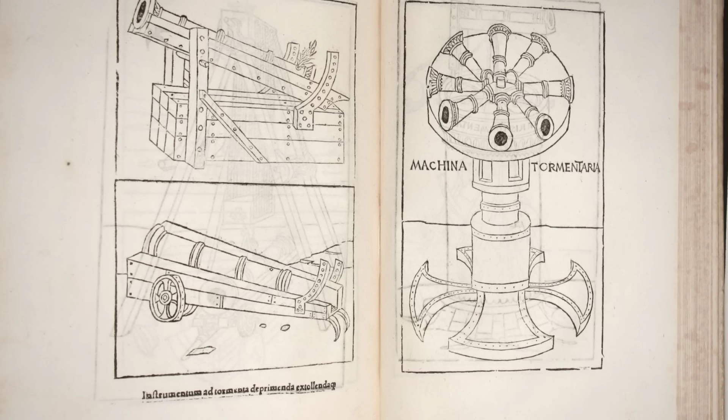We begin not with a monument, a factory, or a patent office, but with a book that should not contain what it contains, a book whose pages describe machines that would not be built, fielded, or even named until centuries after the ink dried. The parchment is cracked, the handwriting slants, the diagrams are colored by hand, and yet inside those diagrams are the compound crank, the camshaft, the feedback loop, the programmable drum, the pressure valve, the rocket, the diving suit, and the logic of every piston engine on Earth.

5 of these books survive. Each one predates the invention it describes by a margin that should not be possible. We are going to open all 5, and we are going to count them down in reverse, because the oldest and the strangest comes last.

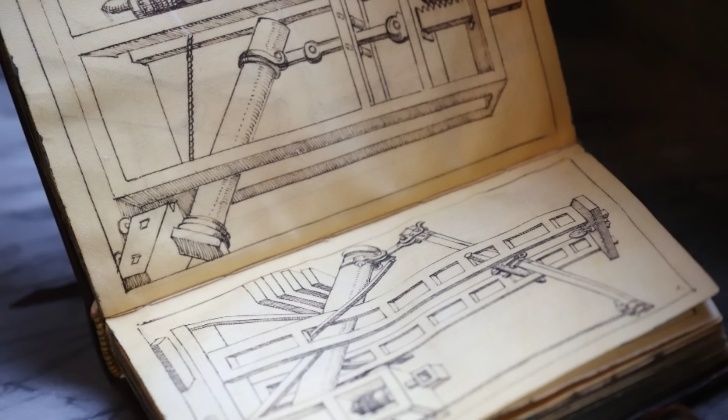Number 5. Siena, central Italy. The year is 1433. A city engineer named Mariano di Jacopo, better known by his nickname Taccola, is finishing a manuscript he has been working on for 14 years. He calls it De Ingeneis, on engines. 4 books bound together, hundreds of folios, thousands of drawings.

The manuscript is timed for a royal visit. King Sigismund of Luxembourg is passing through Siena on his way to be crowned Holy Roman Emperor in Rome, and Taccola wants to present the book to him personally. What Sigismund holds in his hands that day is the single most important technical document of the 15th century, and nobody in that room fully understands it.

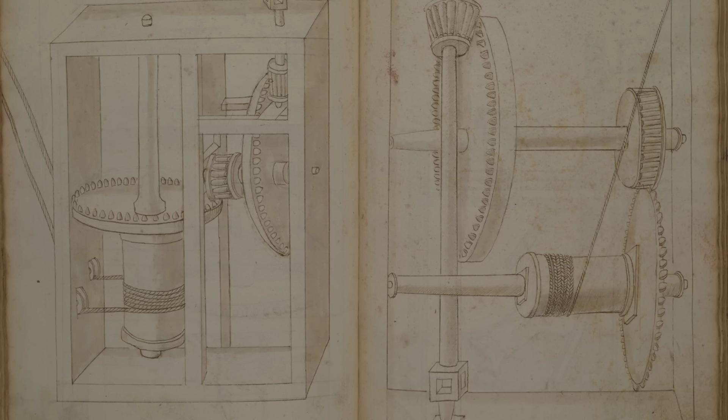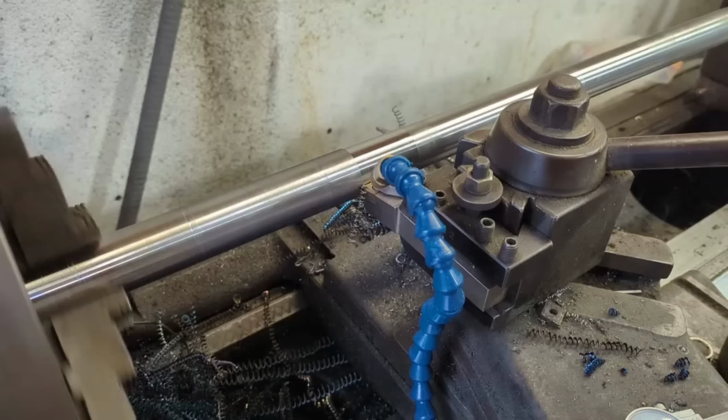Because buried in the pages of De Ingeneis are 2 mechanisms that will quietly reshape the next 500 years of human civilization. The first is the chain transmission, the direct ancestor of the bicycle chain, the motorcycle chain, the roller chain that drives every industrial conveyor on the planet. The second, and this is where the impossibility begins, is the crank with connecting rod, the compound crank.

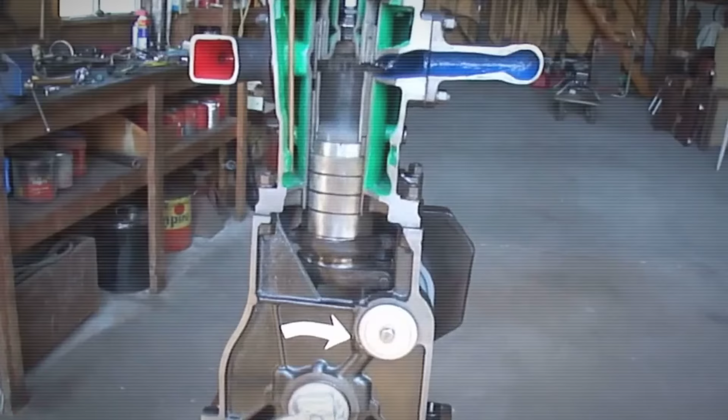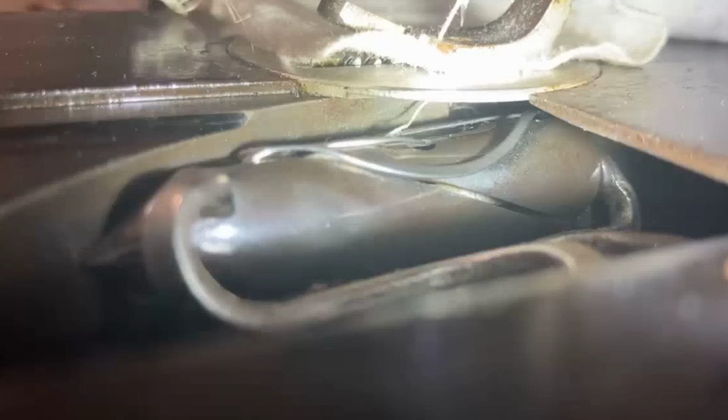Stop for a moment and consider what that mechanism actually does. It takes a wheel going round and round, and it converts that circular motion into a piston going back and forth. That is the defining component of the steam engine. It is the defining component of the internal combustion engine. It is the defining component of the sewing machine, the locomotive, the water pump, and the pneumatic drill. Every car engine on Earth runs on this principle.

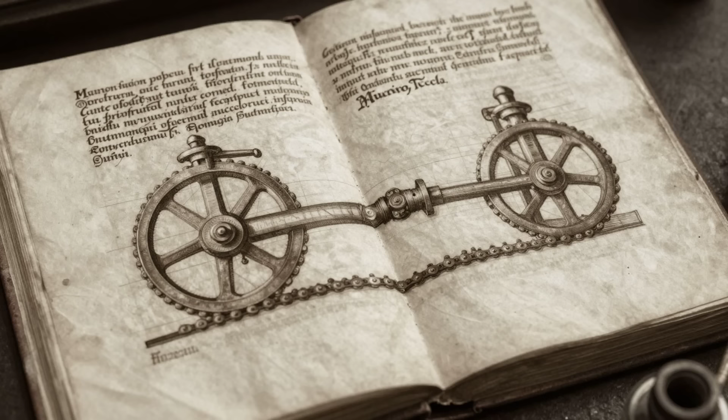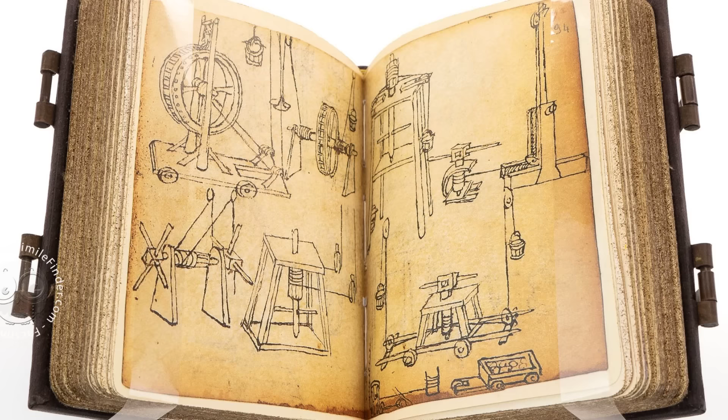Taccola drew it 400 years before the Industrial Revolution would run on it. He drew it while he was supervising road repairs in a medieval Italian city-state. He drew it next to sketches of harbor cranes and aqueducts and siege engines, as if it were just another useful machine. Taccola was nicknamed the Sienese Archimedes. He was a notary, a sculptor, a superintendent of roads, and a hydraulic engineer. His drawings influenced Francesco di Giorgio, the next great Sienese engineer.

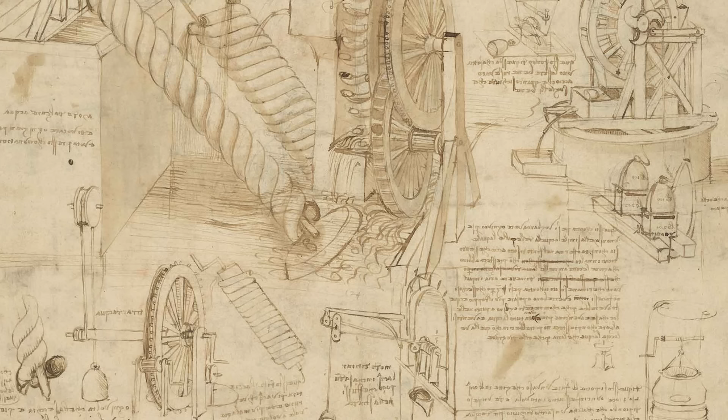And through Francesco di Giorgio, they reached the hands of a young Tuscan polymath named Leonardo da Vinci. Leonardo's Codex Atlanticus, the most famous engineering notebook in Western history, contains chain transmissions and crank mechanisms that are demonstrably traceable back to Taccola. The man credited with inventing the modern machine simply copied them from the man who actually did. Skeptics argue Taccola only documented existing craft knowledge rather than inventing anything himself.

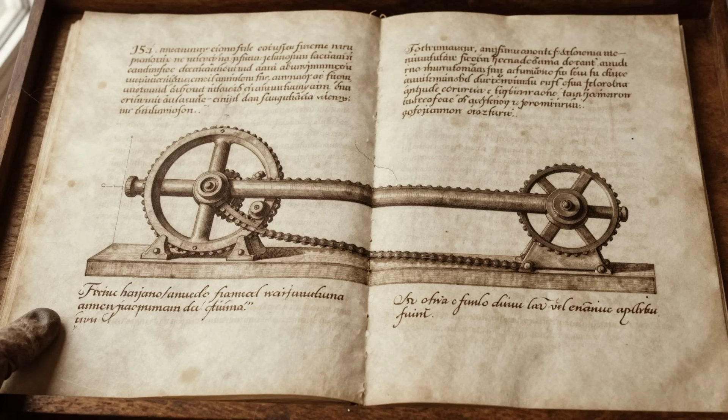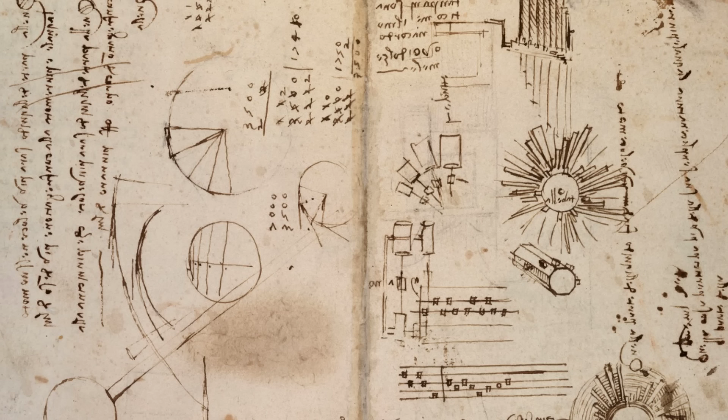It does not matter. The manuscript is the earliest explicit written record. Before De Ingeneis, the compound crank with connecting rod does not exist on paper in European civilization. After De Ingeneis, it exists in Leonardo's notebooks, then in German mining manuals, then in steam engine patents, then in every mechanical dictionary from the Enlightenment forward. There is a single doorway, and the doorway is a Sienese civil engineer sketching by candlelight in 1433, waiting for a king.

Number 4. A man walks underwater in a sealed suit. Another sketches rockets arcing across the sky. Both drawings sit on facing pages of the same book, almost 4 centuries before either weapon reaches a European battlefield.

Eichstätt, Bavaria. The year is 1405. A physician and military engineer named Konrad Kyeser is living in political exile. He used to serve King Wenceslaus IV of Bohemia at the court in Prague, until Wenceslaus was deposed in 1400 and Kyeser had to flee. He has spent the last 3 years in a small Bavarian town, writing and illustrating a manuscript he calls Bellifortis, Latin for strong in war.

The finished book is roughly 140 folios of parchment, every page illustrated in color, every mechanism labeled. It survives today at the University of Göttingen Library under the shelf mark Codex Ms. Philos, 63. Kyeser dedicates it to Rupert, the new German king.

What he presents is the first fully illustrated manual of military technology in European history, and it contains technology that European armies will not actually field for centuries. Turn to one folio and you find a man walking underwater in a sealed suit, a diving suit. Not a bell, not a barrel, a suit.

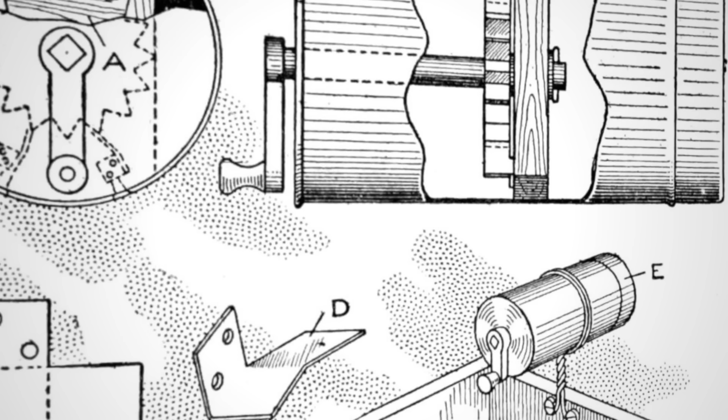A wheel with mercury-filled hammers attached to its rim, designed so that the falling hammers on one side will always outweigh the rising hammers on the other, so that the wheel will turn forever without any input. It will not work. The physics does not permit it. But Villard is the first European and one of the earliest writers anywhere on Earth to attempt perpetual motion on paper. The concept itself, the very idea of a machine that runs forever, would not be named in Western science for decades after his death.

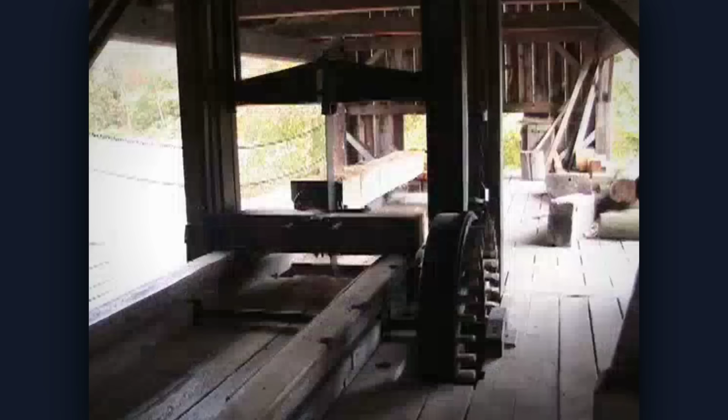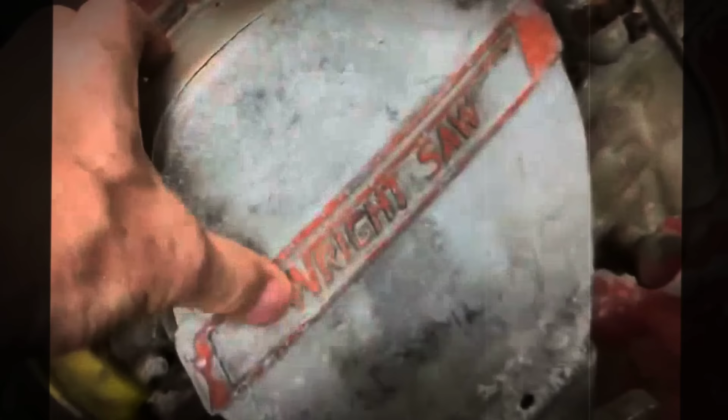Turn another page. A water-driven sawmill, not a simple water-powered blade, a sawmill with automatic log feed. The water wheel's axle drives a ratchet wheel. The ratchet wheel advances the log into the blade by precise increments. A separate mechanism engages a triangular frame to push the saw downward into the cut. A bent sapling pole acts as a spring, resetting the blade between strokes. A 13th century mason drew a machine that feeds itself logs, cuts them, and resets itself, all powered by the current of a river. This is a self-feeding concept rendered on parchment.

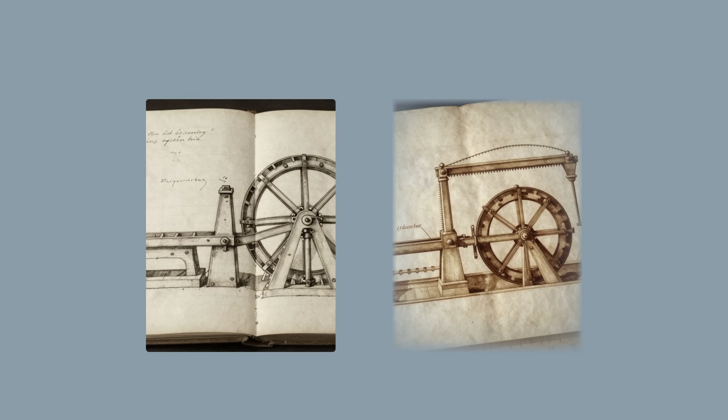Modern engineers have examined the drawing and argued about whether it would actually run. The argument is itself the evidence. We are not debating whether a medieval craftsman could imagine a self-feeding industrial saw. We are debating whether his specific drawing would function.

Turn again, and you find the trebuchet, not a simple torsion catapult, a counterweight trebuchet with a trestle frame and a counterweight box, estimated at roughly 18 cubic meters, capable of holding 30 tons of ballast. Modern reconstructions calculate that this machine could hurl a 100-kilogram stone more than 400 meters.

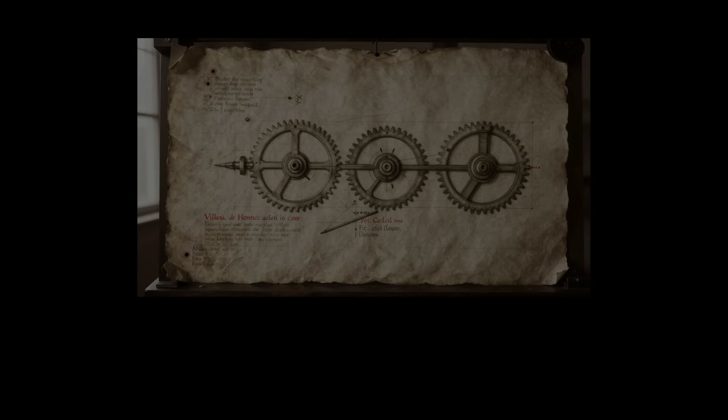Turn once more, and you reach the drawing that for much of the 20th century was cited as the first mechanical escapement in Western history. Villard labels it with the line about how to make an angel keep pointing his finger at the sun. For decades, historians pointed to that sketch and said that Villard had drawn the heart of the clock, the component that regulates the ticking, roughly 60 years before the verified mechanical clock appears in European records.

Scholarly consensus has since shifted. The angel drawing is not a true escapement in the strict horological sense. The debate is unresolved. But even without the escapement, the rest of the notebook is already impossible.

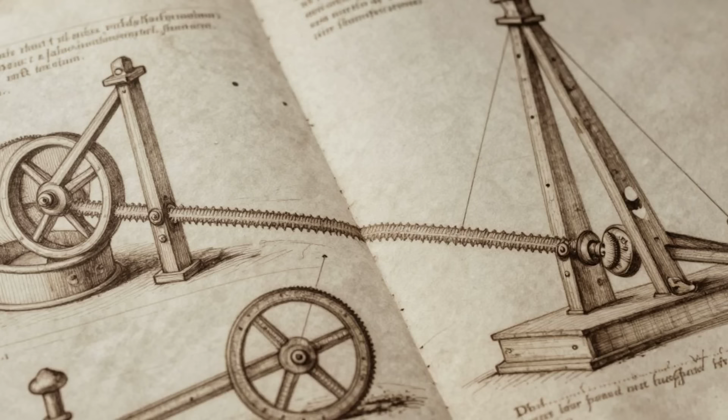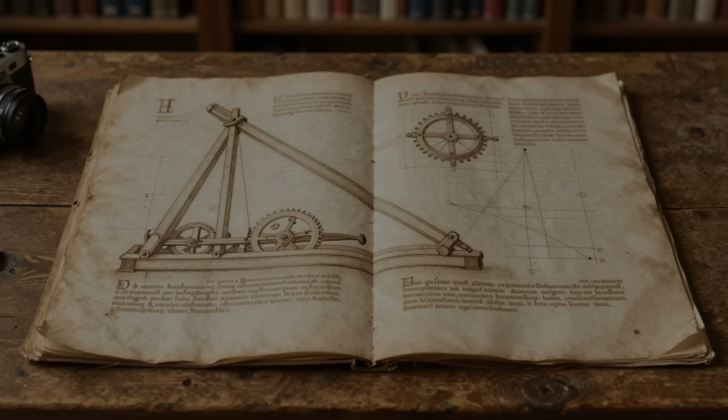Not in the century we are taught was mud, plague, and superstition. Skeptics say he copied from Byzantine and Arab sources he encountered on his travels. Fine. His notebook is still the earliest surviving Western document that draws these machines with working detail. The portfolio is the leak. The knowledge was somewhere. Villard is the man who wrote it down.

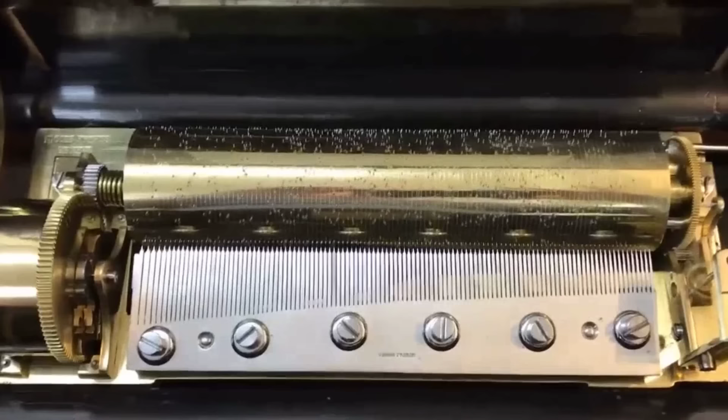Number 2. A boat drifts across a palace lake. 4 robot drummers sit on it, playing a rhythm that can be reprogrammed by moving pegs on a drum. The year is 1206. The region called Al-Jazira, Upper Mesopotamia, in what is now southern Turkey. An elderly engineer named Badi al-Zaman Abu al-Iz ibn al-Razaz al-Jazari is finishing a manuscript in the final months of his life. He has served 3 successive Artukid sultans as chief court engineer.

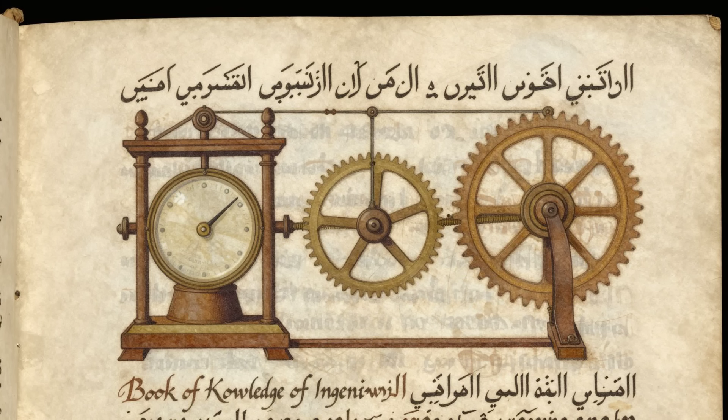He presents the finished book to his current sultan, Nasir al-Din Mahmud. Its title in Arabic translates as The Book of Knowledge of Ingenious Mechanical Devices. Inside, Al-Jazari catalogs more than 50 machines across 6 categories: water clocks, trick-drinking vessels, phlebotomy devices, fountains and musical automata, water-raising machines, and miscellaneous ingenious devices. The finest surviving illuminated copy is in the Topkapi Palace Library in Istanbul.

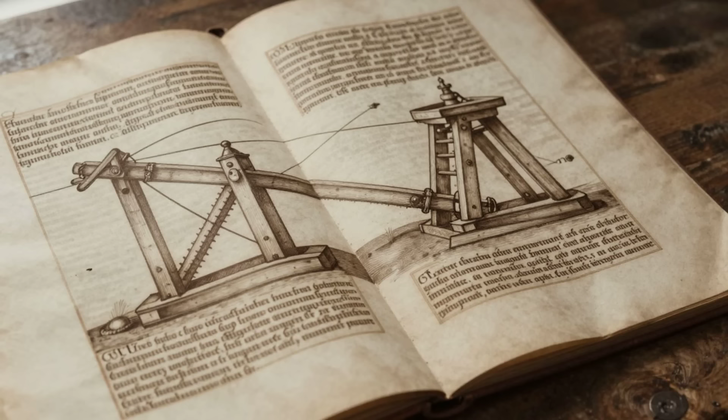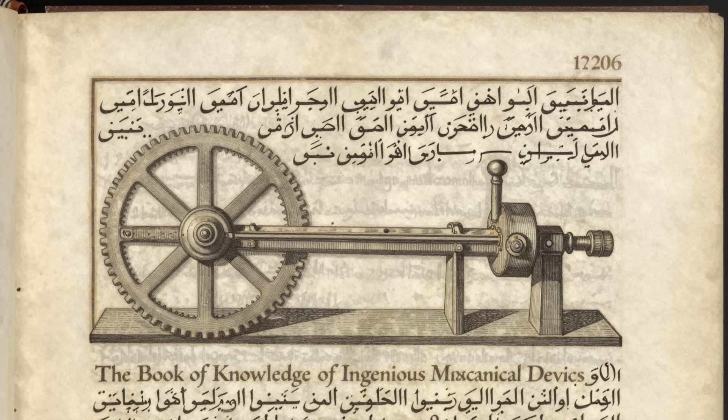The manuscript does not merely describe machines. It introduces mechanisms that will not enter the European written record for another 200 to 500 years. Al-Jazari is credited with the first documented camshaft, a rotating shaft with cams attached, converting circular motion into precisely timed linear strokes. He uses it in water clocks, and candle clocks, and water-raising machines. The cam and camshaft will not appear in European mechanisms until the 14th century.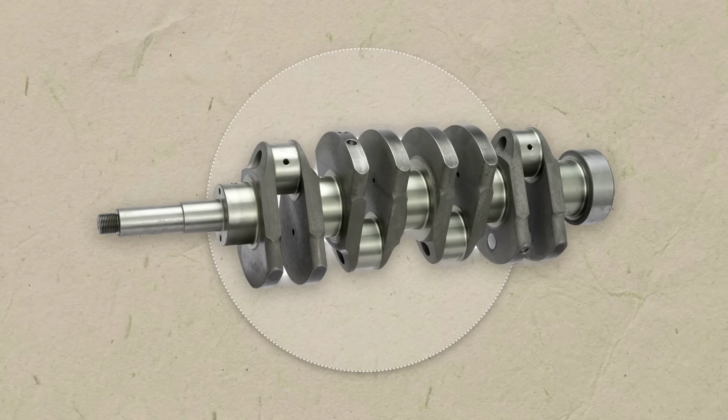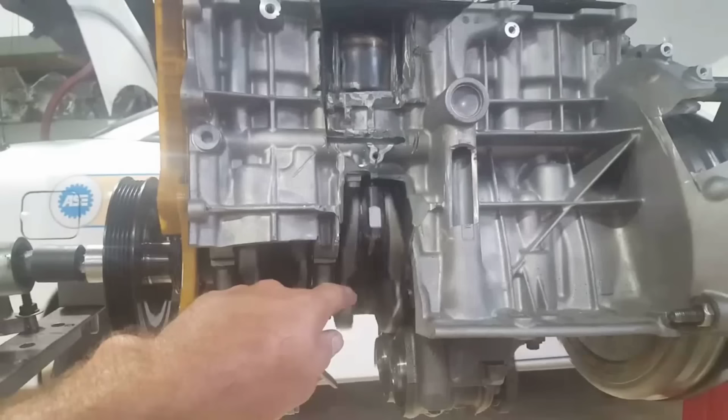He's also credited with the first known crankshaft combined with a connecting rod. In 1206, Al-Jazari draws a twin-cylinder water pump powered by a wheel whose rotation drives crank pins into linear motion. Functionally, it is identical to the crankshaft in a modern internal combustion engine.

And then there is the boat. 4 humanoid figures sit on a small vessel that drifts on an artificial lake during royal banquets. The figures play drums, cymbals, and flutes. The rhythm shifts, the beat changes. The melody moves from one pattern to another. Inside the boat, hidden from the guests, there is a rotating drum studded with pegs. The pegs strike levers. The levers activate the musicians.

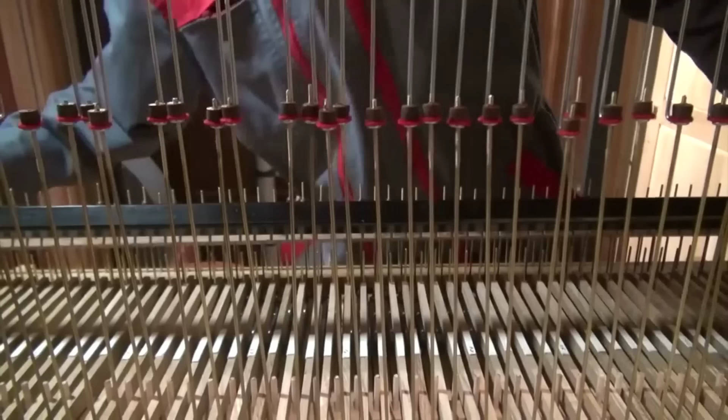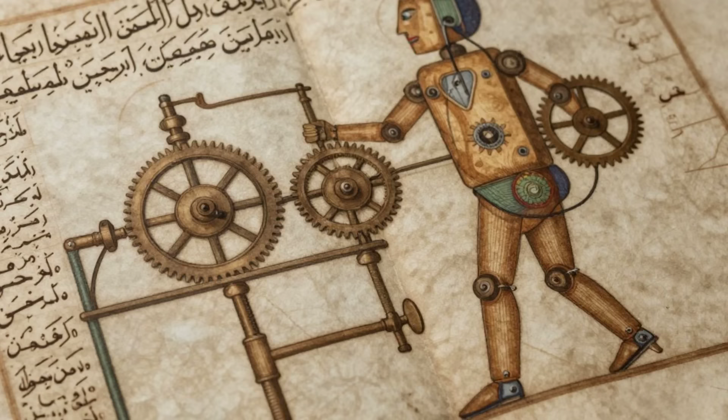And here is the detail that changes everything. Move the pegs, and the music changes. The machine is programmable. In 1206, 820 years ago, Al-Jazari drew the first recorded designs of a programmable humanoid automaton.

The underlying logic, pegs on a rotating cylinder, triggering actions in sequence, is the same logic of the music box, the same logic of the player piano roll, the same logic of the jacquard loom, and the same logic of the Hollerith punch card that would eventually give rise to the computer. The binary architecture of programmable machinery begins on a boat floating on a palace lake in medieval Mesopotamia.

Al-Jazari also designs the elephant clock, an 11-foot water clock housed inside a carved wooden elephant. Every half hour, an automaton strikes a cymbal, a mechanical bird chirps, a serpent pivots, a scribe's pen rotates to point at the time. It is the first clock anywhere on Earth in which an automaton reacts at timed intervals.

He designs the castle clock, an 11-foot astronomical display tracking solar and lunar positions, zodiac signs, and programmable chimes. Historians of computing call it the earliest programmable analog computer. He designs the first double-action suction pump with valves, a key step on the road to the vacuum pump, and ultimately the steam engine.

A dying Muslim engineer in a small medieval court in what is today southern Turkey finished a book and presented it to his sultan in 1206. Inside the book, he drew a boat with 4 robot drummers whose beat could be reprogrammed by moving pegs on a drum. That is the architecture of every computer now running on Earth, drawn 820 years ago.

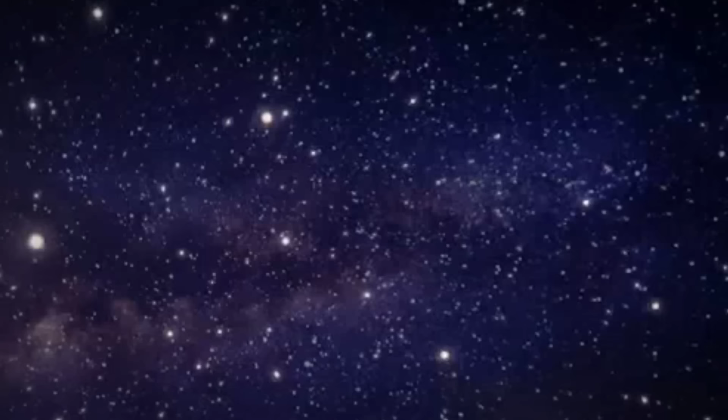Number 1, a thermostat, drawn in Baghdad, 1100 years before the word existed. The House of Wisdom. The year is approximately 850 Common Era. 3 brothers are finishing a book, Abu Ja'far Muhammad, Abu al-Qasim Ahmad, and al-Hassan. They are the sons of Mūsā ibn Shakir, a former bandit who reformed and became court astronomer under the Caliph al-Ma'mun.

After their father's death, the boys were raised as wards of the Caliph himself and educated at the Bait al-Hikmah, the House of Wisdom, the greatest research institution of the 9th century. They grow up to become the leading scientists of the Islamic Golden Age. And around the year 850, the 3 brothers complete the Kitab al-Hiyal, the Book of Ingenious Devices. Inside it, they describe roughly 100 mechanical devices.

This is the oldest manuscript on our list, and for the title of this video, it is the single strongest case. The Banu Musa manuscript describes machines whose underlying logic would not be formalized as an engineering discipline until Norbert Wiener's Cybernetics in 1948. An essay from the scholarly series Muslim Heritage states it plainly.

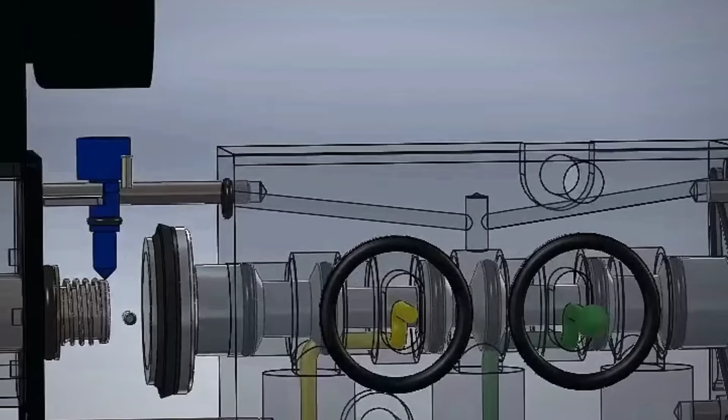The closest modern parallel to the work of the Banu Musa brothers lies in control engineering and pneumatic instrumentation, not medieval craft, not clockwork, control engineering. The field that runs every autopilot, every thermostat, every cruise control, every industrial regulator, and every process loop in every factory on Earth.

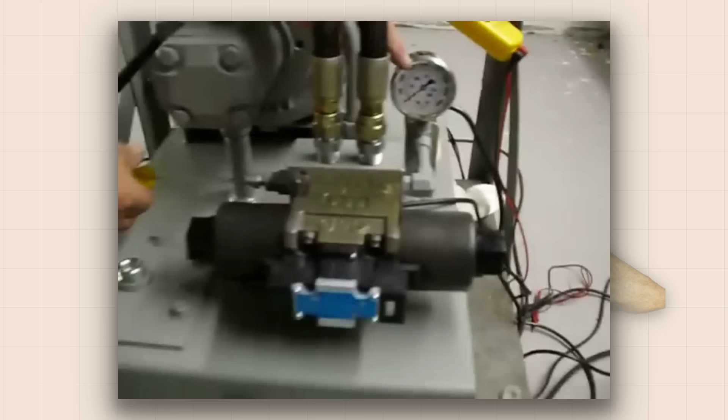The brothers describe the first known use of conical valves as automatic inline flow controllers. That is the working principle of every modern pneumatic and hydraulic regulator. They describe the first feedback controller, a device in which the output of a system is used to automatically regulate its own input. That is the architecture of a thermostat. That is the architecture of an autopilot. That is the architecture of cruise control. The Banu Musa built one in Baghdad, 1100 years before the word cybernetics existed.

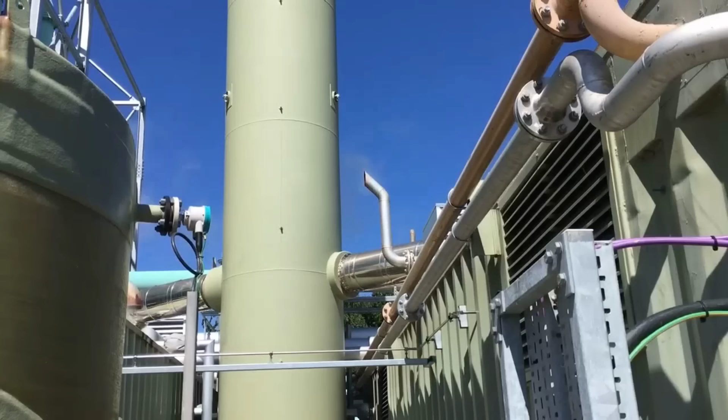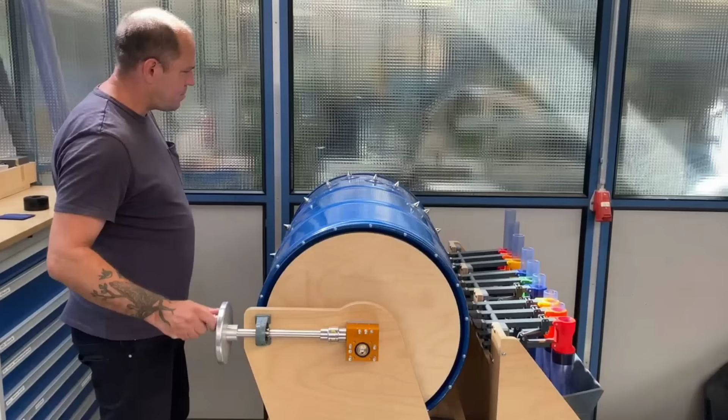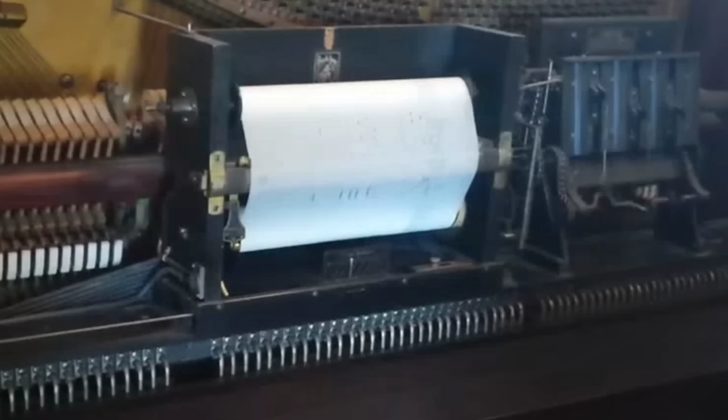They described the first fail-safe logic. Trick vessels that permit small withdrawals of liquid but lock out after a large withdrawal. A deliberately engineered mechanical if-then statement. A logical gate built from copper, brass, and water pressure. They describe the earliest known mechanical musical instrument on Earth, a hydro-powered organ that plays interchangeable cylinders. Swap the cylinder, swap the melody. A programmable machine 3.5 centuries before Al-Jazari and 1,000 years before the first player piano.

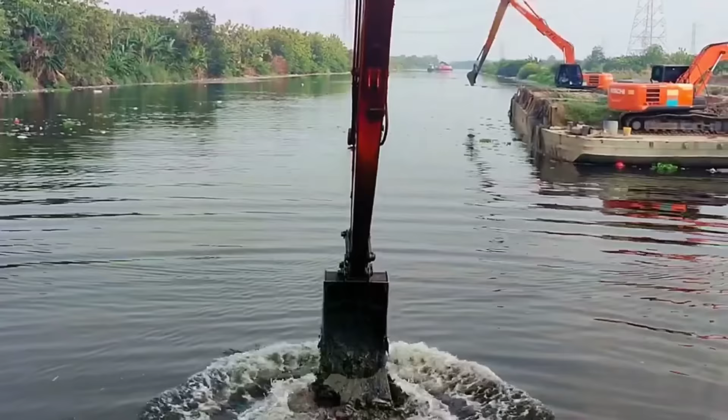They describe a self-trimming lamp whose wick advances automatically as it burns. They describe gas masks specifically designed for workers entering polluted wells and mine shafts. They describe a clamshell grab, a dredging device lowered on ropes to scoop mud from the bottom of rivers and canals, operated entirely from the surface. That exact design, the clamshell grab, is still in use today on 21st century construction sites. A medieval Baghdad invention is still moving Earth on modern riverbeds.

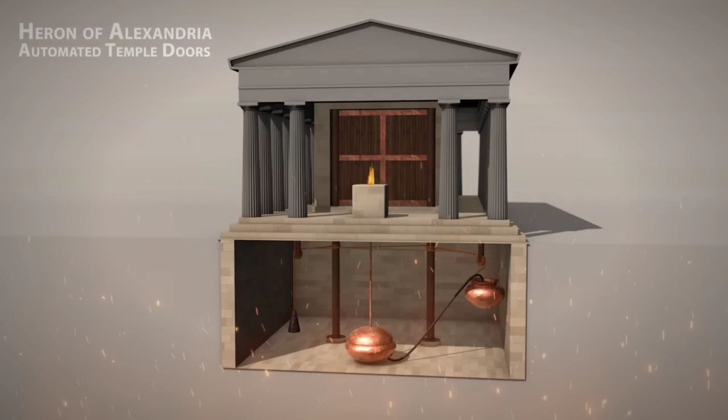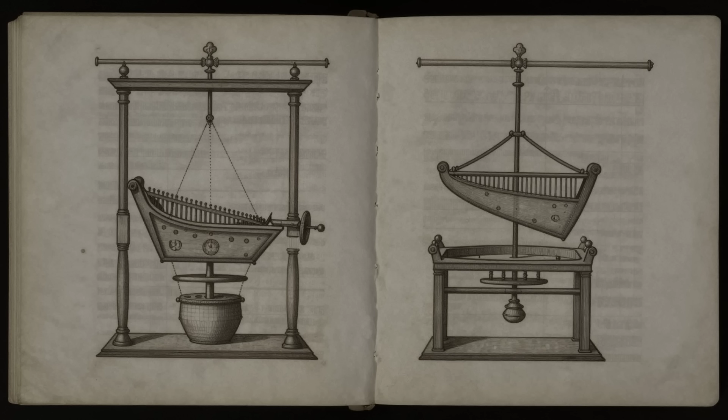Skeptics note that the Banu Musa borrowed from Hero of Alexandria and Philo of Byzantium. That is true, and it is the wrong objection. Hero's devices are tricks, temple doors that open when a fire is lit, coin-operated holy water vendors, party pieces. What the Banu Musa added was automatic control, machines that sense a state, compare it to a target, and change their own behavior accordingly. That closed feedback loop is absent from Hero. It is absent from Philo. It is absent from every earlier source we have. And it is the single invention that separates a toy from a thermostat. It separates a music box from a computer. It separates ornament from engineering.

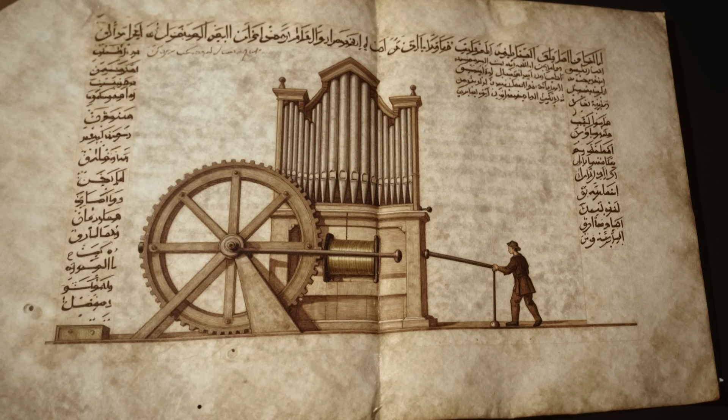In 850 of the Common Era, while much of Europe could not reliably light a candle after sunset, 3 brothers at the Baghdad House of Wisdom wrote a book. In it, a lamp that feeds its own wick, a vessel that drinks from a barrel and stops on its own when it has had enough, a music player with interchangeable programs, and a thermostat, 1100 years before the word thermostat existed. The discipline that studies machines like these would not be named until after the Second World War. The machines were already drawn before the Vikings reached North America.

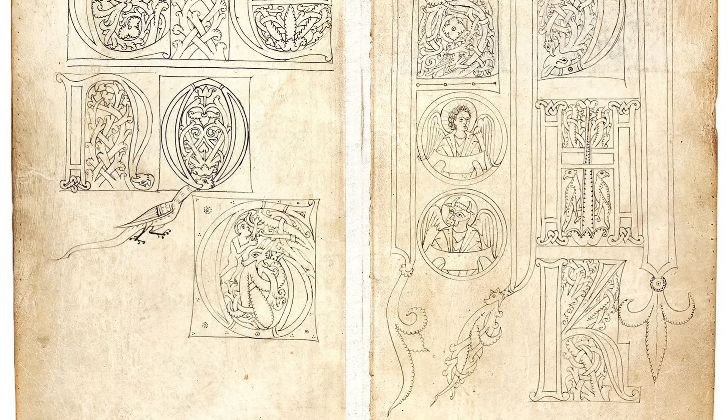5 manuscripts, 5 engineers, 600 years of calendar between the oldest and the youngest, 3 civilizations, 1 Italian civic engineer, 1 exiled German military physician, 1 traveling French mason, 1 Artukid court polymath, and 3 brothers at the House of Wisdom in Abbasid Baghdad. Between them, they drew the compound crank, the connecting rod, the chain transmission, the camshaft, the crankshaft, the programmable automaton, the feedback controller, the fail-safe logic gate, the conical flow valve, the self-trimming lamp, the hydro-powered programmable organ, the dredging clamshell, the gas mask, the diving suit, the rocket, the handheld firearm, the counterweight trebuchet, the self-feeding sawmill, and the perpetual motion wheel.

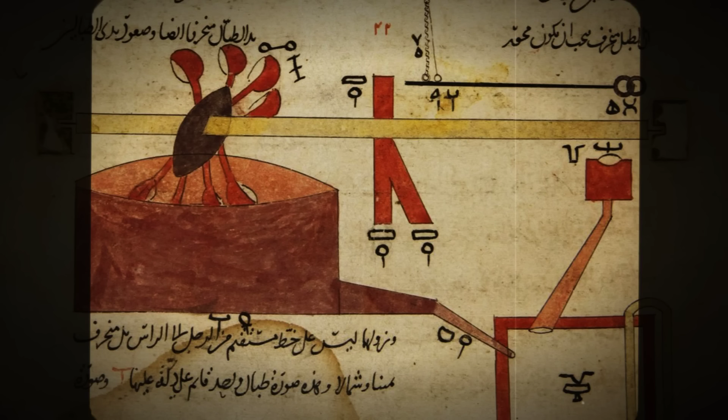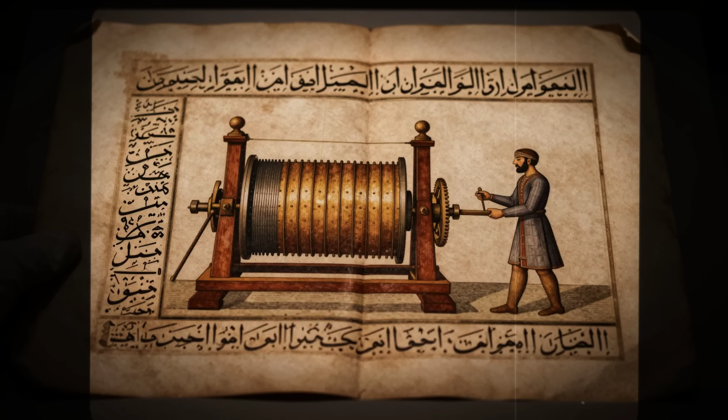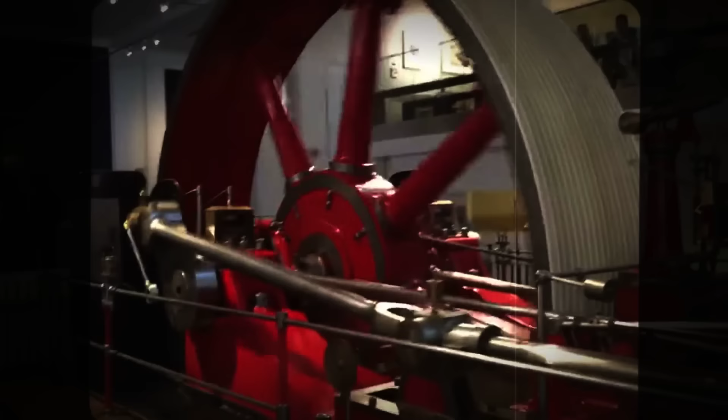Every one of these mechanisms appears in the historical record centuries before it is supposed to exist. Every one of them survives on parchment because somebody cared enough to draw it carefully, label it clearly, and protect the manuscript for 800 years or more. Think about what that actually means. Somebody in Baghdad in 850 drew a thermostat. Somebody in Mesopotamia in 1206 drew a programmable robot. Somebody in Picardy in 1230 drew a machine designed to feed itself logs and cut them without a human hand. Somebody in Bavaria in 1405 drew a man walking underwater with a sealed helmet while also drawing rockets and handheld guns on facing pages. And somebody in Siena in 1433 drew the single mechanical conversion that every piston engine on Earth would eventually depend on.

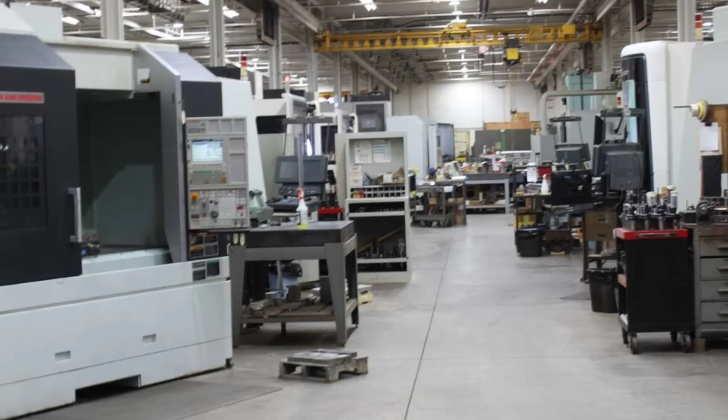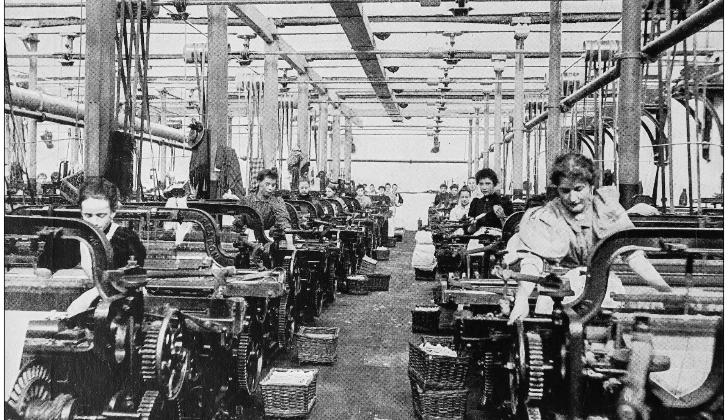None of these men had electricity. None of them had steam. None of them had the metallurgy, the precision tooling, or the industrial supply chain that the 20th century treats as the price of admission for serious engineering. What they had was paper, ink, geometry, and the stubborn refusal to treat the future as somebody else's problem. The textbooks will tell you the Industrial Revolution was a European phenomenon of the 18th century. The manuscripts tell you something else. The manuscripts tell you the Industrial Revolution was a library.

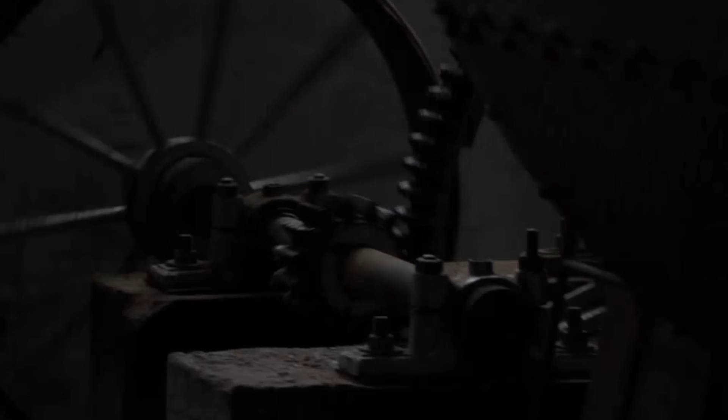It was a slow, patient, manuscript by manuscript accumulation of mechanisms drawn by engineers in Baghdad, in Diyarbakir, in Picardy, in Bavaria, and in Siena across 6 centuries, in 3 civilizations, in 4 languages, on cracked parchment that somehow survived fire, flood, plague, and politics to reach us. The modern world did not invent itself. It inherited itself, page by page, diagram by diagram, from engineers whose names most of us were never taught. The blueprints were already drawn. We were just the civilization that finally got around to building them.